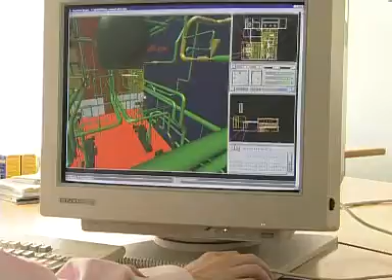Tractebel Energy Engineering is a division of Tractebel, a global energy and services business. Tractebel Energy Engineering is active in virtual reality since 1992. Starting from its CAD modeling experience, it derived expertise in visualization, with applications in, among other things, walkthrough of engineering models, object motion, clash detection, clearance checks, which help the project partners to better understand the complex building layouts during a design review.

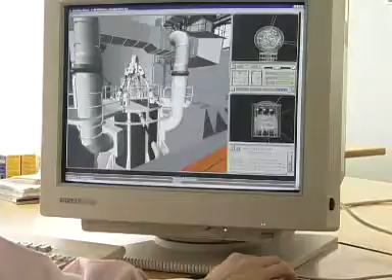This expertise was developed to support steam generator replacement projects in 3 nuclear plants where very large engineering models containing more than 1 million objects were used. Later on, Tractebel Energy Engineering applied the same integrated techniques to 5 conventional plants.

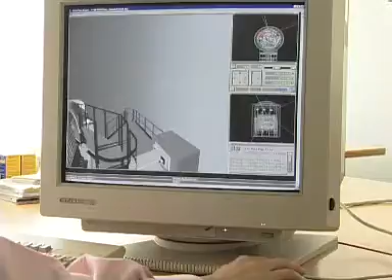Tractebel Energy Engineering, realizing the potential of VR not only in design but also in plant maintenance, launched a market survey in '97 and ended up with the conclusion that 3D PC game engines proved surprisingly well suited for engineering. Accordingly, Tractebel Energy Engineering developed a strong know-how in their use for industrial applications. PC games have major advantages over conventional VR tools as they target the mass market. They're easy to install, to use, to run on a standard PC, and, last but not least, they are cheap.

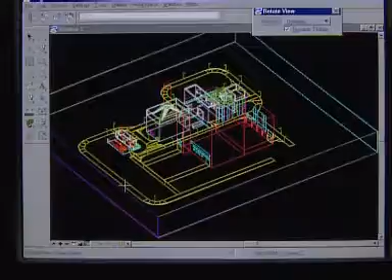A common problem with VR applications is design data input. A good knowledge of the algorithms behind the 3D engines has allowed Tractebel Energy Engineering to write a converter to translate 3-dimensional CAD models to game file formats.

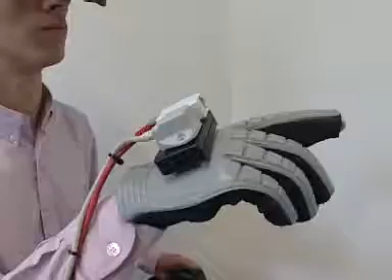Tractebel Energy Engineering has developed specific interface software with virtual reality hardware, head-mounted displays, 3D shutter glasses, 3D trackers and data gloves. Your virtual hand is fully operational in the virtual environment. Our other specially tailored backpack bundle allows complete freedom of gestures or movements. Retrieving a path in a complex building will be easier after a virtual walkthrough. In many cases, the simple mouse screen interface is nevertheless sufficient to support the application.

3D game engines provide very interesting features to enhance the realism of the virtual scene. Collision detection, realistic-looking shadows, transparency, object and character animation, smoke, network multi-user. Reflection.

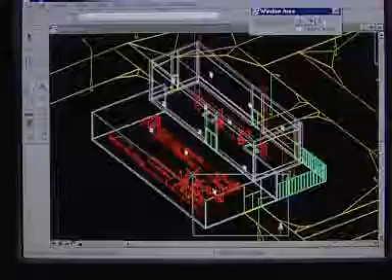Game engines are open to customization. Tractebel Energy Engineering added new tools to allow the user to interact with the virtual environment. He can now point to interesting spots, activate equipment, manipulate objects. Depending on the needs, new functionalities can be added to specific items.

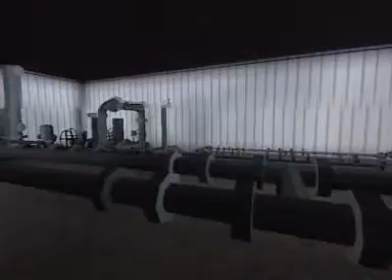The translator allows information from the technical database to be available in the VR mode. The user is free to interrogate components and equipment to retrieve their specific tags, its functional identification, for instance. On the other hand, the user can be teleported in front of the equipment matching the tag he requested. This functionality is very interesting when plant maintenance is subcontracted to external crews.

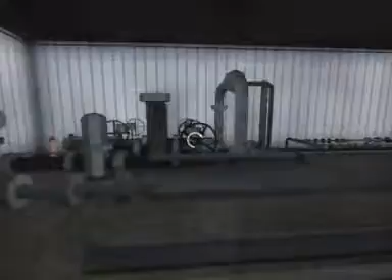Project review, including clearance and access checking, are directly available from the raw conversion of the CAD model. This approach is by far more intuitive than the reading of complex layout drawings. Outdoor scenes can be used for visual or noise impact evaluation purposes.

Virtual reality is a perfect tool for learning and training in hazardous, unfriendly, or very remote places. Even in safe places, rehearsal and drill of rare and otherwise impossible to recreate events are now possible. The performance of trainees can be monitored by the system. Tractebel and Engie Engineering believes that training on VR can dramatically reduce human injuries and plant outage.

For ergonomic studies, our manipulation tools allow to move furniture or equipment and check visibility of displays from the desired control room operator positions. Through a network connection, several users physically far away can meet in the same 3D model. Then remote experts can be called to show complex manipulations or paths. Simple internet or dial-up line connection is enough to support this functionality.

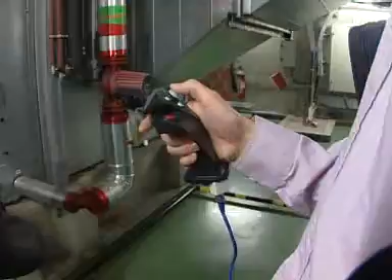What can Tractebel and Engie Engineering do for you in the application of VR to plant design and maintenance? Tractebel and Engie Engineering will help you analyze your needs and specify the VR application. It will select the right system to support your application. Tractebel and Engie Engineering can recover existing CAD data as input to this system. It can customize it to suit your specific needs and interface it with VR peripherals if needed. And most of all, thanks to its broad engineering expertise, Tractebel and Engie Engineering will set up a productive system focused on your requirements.